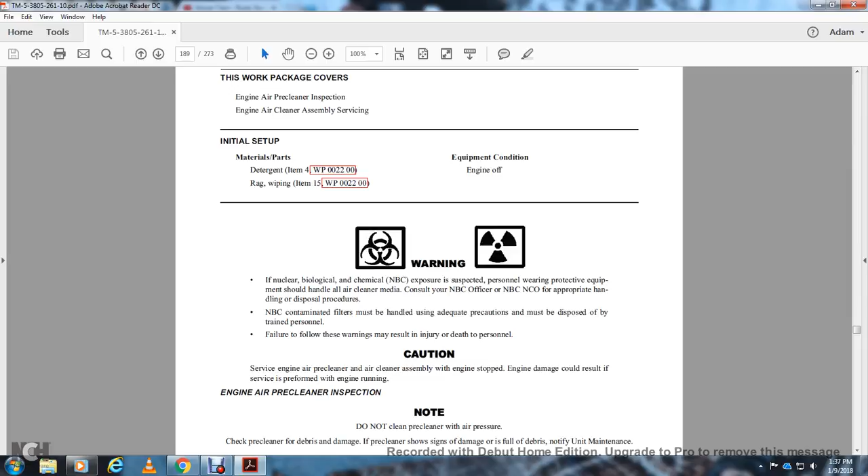Caution: servicing the engine air cleaner assembly while the engine is running could result in engine damage. Service should be performed with the engine stopped, not with the engine running, during air cleaner inspection.

Note: do not clean the pre-cleaner with air pressure. Check the pre-cleaner for debris or damage. If the pre-cleaner shows signs of damage or is full of debris, notify unit maintenance.

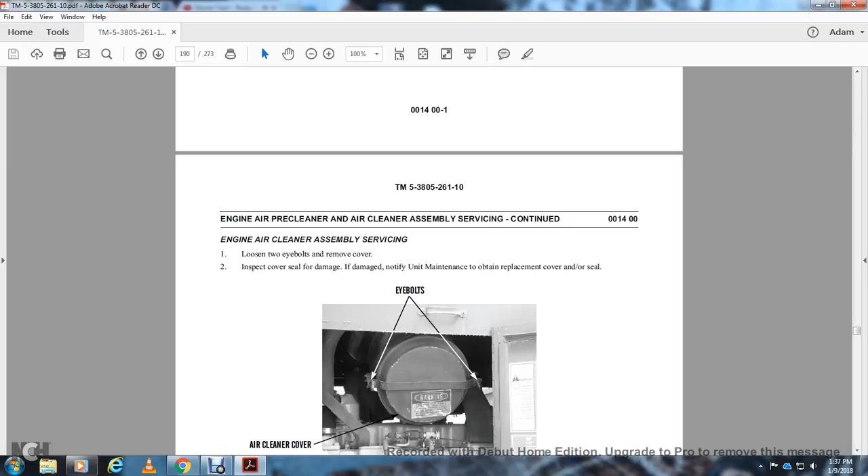Engine air cleaner assembly servicing: loosen the two eye bolts and remove the cover. Inspect the cover seal; if damaged, notify unit maintenance to obtain a replacement cover and seal. The eye bolts and air cleaner cover are shown in the picture.

Remove the primary element from the air cleaner housing. Notify unit maintenance to replace the secondary element if needed. Inspect the secondary element and notify unit maintenance if damaged, or if the primary element has been replaced for the third time. Wipe the inside of the air cleaner housing clean with a rag.

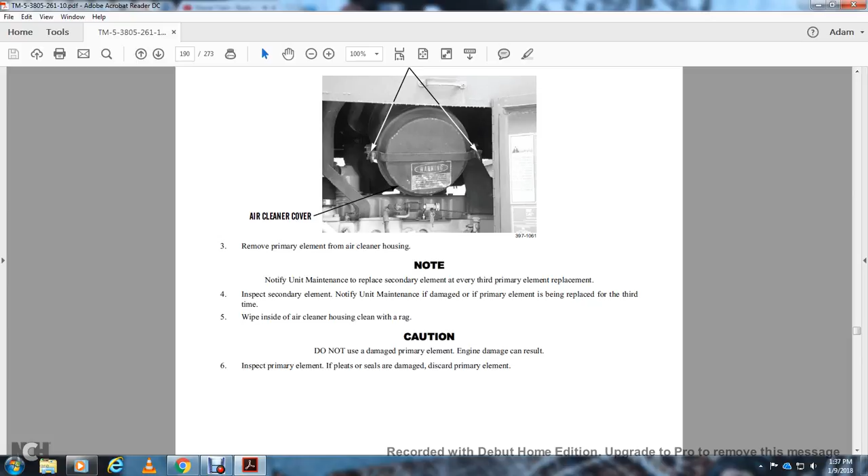Caution: do not use a damaged primary element. Engine damage can result from using a damaged primary element. If the pleats or seals are damaged, discard the primary element.

Engine air cleaner assembly, continued. Note: the primary element may be cleaned a maximum of 6 times. Also, replace the primary element after it has been in service for 1 year. The primary element, secondary element, and air cleaner housing are shown.

To clean the primary element, use compressed air not exceeding 30 psi, or pressurized water not exceeding 40 psi, for cleaning purposes. Wear protective gear including gloves, goggles, and shields, and use caution to avoid injury to personnel.

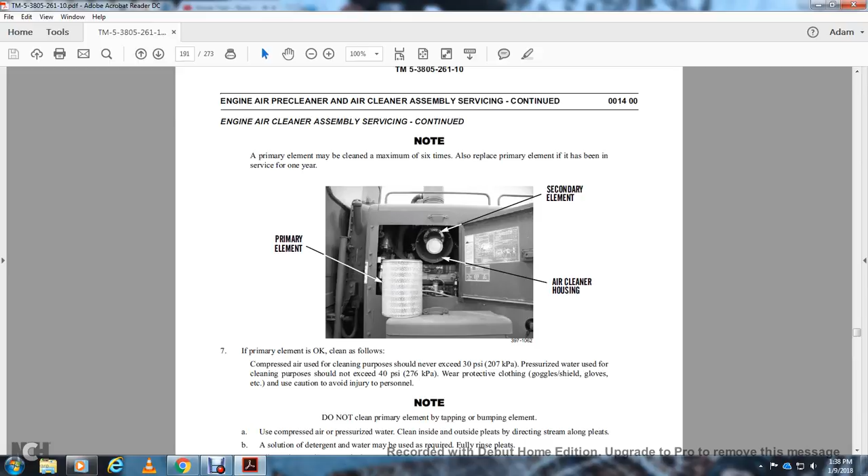Note: do not clean the primary element by tapping or bumping the element. Using compressed air or pressurized water, clean inside and outside of the pleats with a direct stream along the pleats.

A detergent and water solution may be used as required for a full rinse of the pleats. Allow the primary element to air dry completely. Inspect the primary element; if the pleats or seals are damaged, discard the primary element and obtain a replacement.

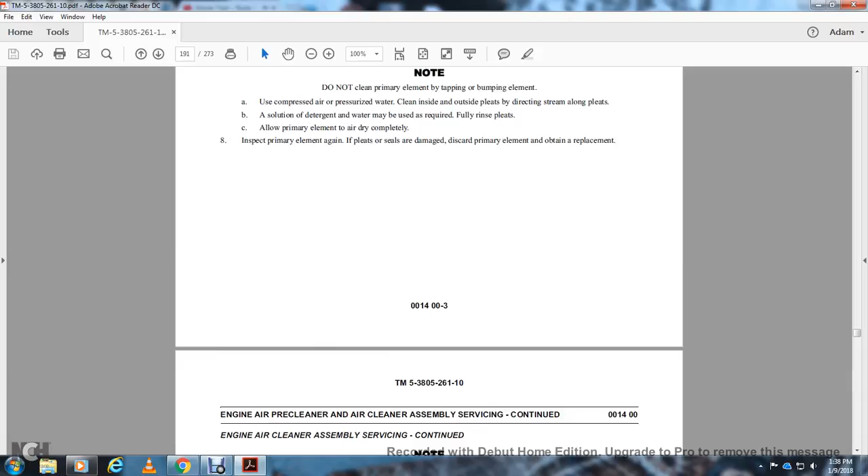Engine air cleaner assembly, continued. Note: the primary element must be clean and dry before installation. Install the primary element inside the air cleaner housing. The primary element, secondary element, and air cleaner housing are shown.

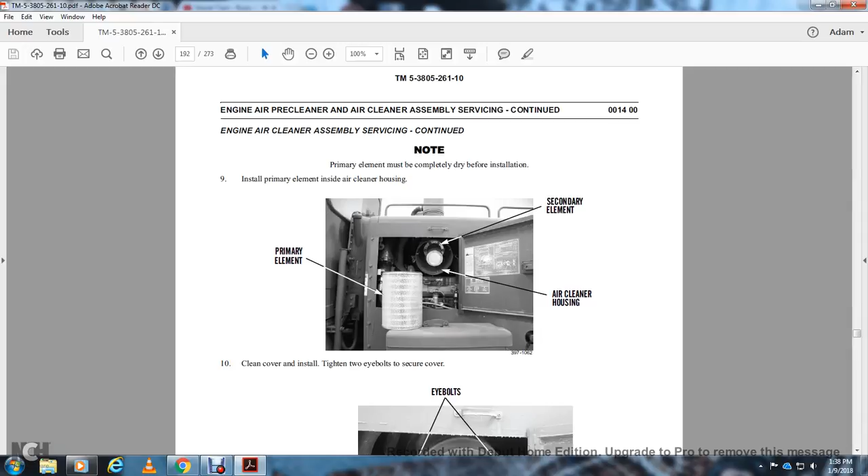Clean the cover and install it. Tighten the two eye bolts to secure the cover. The eye bolts and air cleaner cover are shown.

Air cleaner assembly, continued. Reset the air filter service indicator by pushing on the bottom of the indicator. Start the engine; if the air filter service indicator shows green or yellow, servicing is complete. If the indicator shows red, or if engine exhaust smoke is black, notify unit maintenance. End of work package.

Alright, fuse replacement. The work package covers removal and installation, initial setup of the fuse, and equipment conditions: machine parked on level ground, parking and emergency brake applied, implements lowered to the ground, and battery disconnect switch in the off position.

Warning: ensure the battery disconnect switch is in the off position before working on the fuse panel. Failure to follow this warning may result in injury.

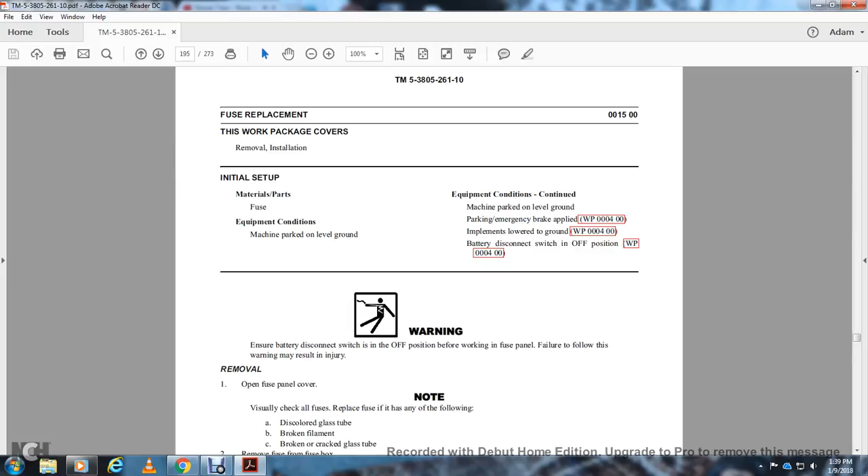Open the fuse panel cover and visually check all fuses. Replace the fuse if any of the following are found: discolored glass tube, broken filament, or broken glass tube. Remove the fuse from the fuse box and consult the unit manual for the replacement fuse.

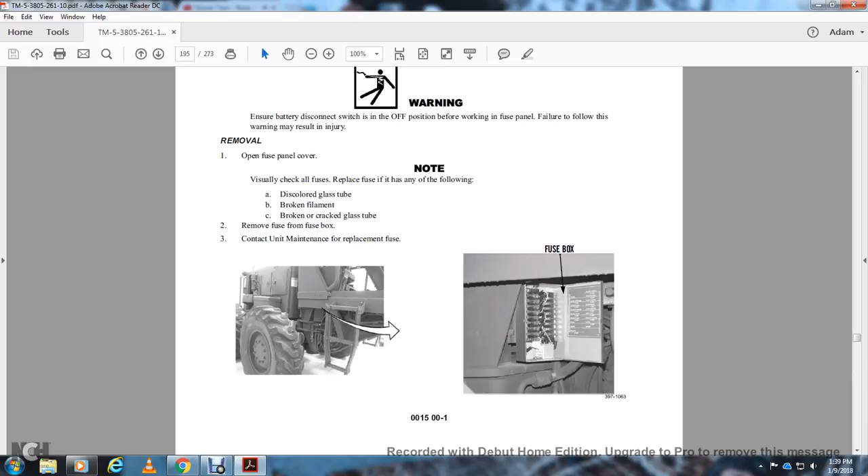The fuse box is shown. Caution: always verify the amperage rating of the new fuse. If not correctly used, a fuse with the wrong amperage could result in damage to the electrical system.

Install the new fuse in the fuse box and close the fuse box panel. Turn the battery disconnect switch on and operate the electrical system related for the new fuse to verify correct operation.

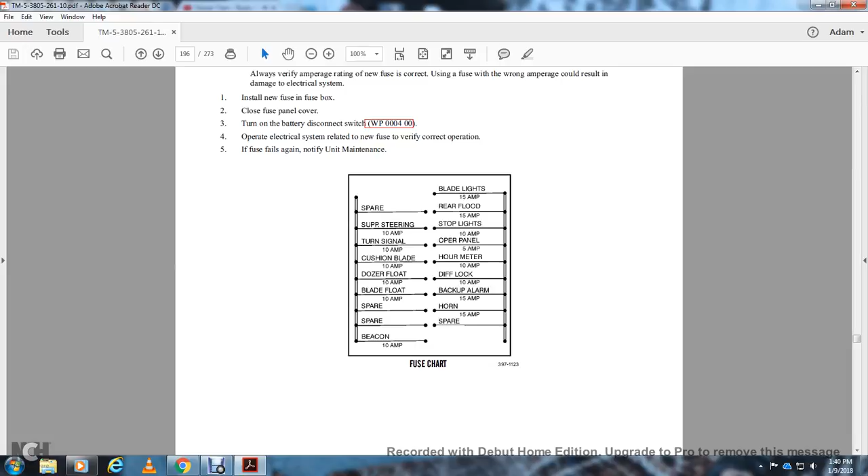If the fuse fails again, notify unit maintenance. Your fuse chart shows the spare, supplemental steering, turn signal, cushion blade, dozer float, blade float, spare beacon, spare horn, backup alarm, diff lock, hours meter, operator's panel, stop lights, rear flood, and blade lights.

Alright, tire maintenance. The work package for the tire pressure adjustment.

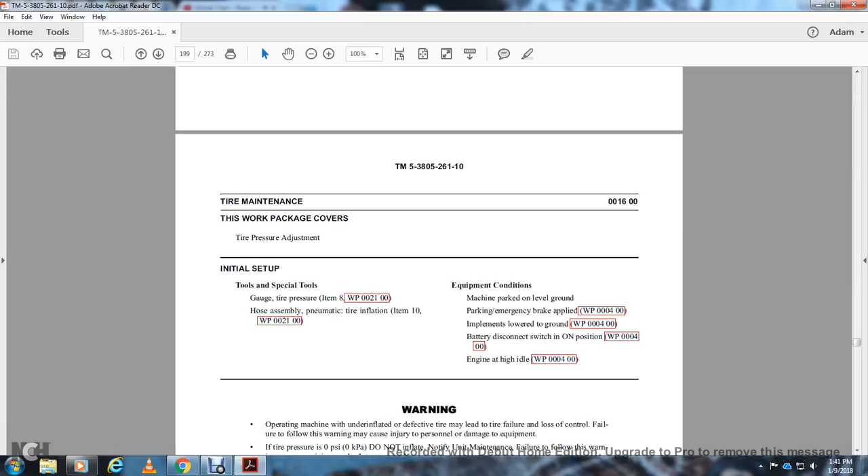Initial setup of tools and special tools: tire pressure gauge, hose assembly, pneumatic hose assembly, tire inflation. Machine parked on level ground, parking and emergency brake set, implements lowered to the ground, and battery disconnect switch on. Position engine at high idle.

Warning: operating the machine with an underinflated or defective tire may cause tire failure and loss of control. Failure to follow this warning may cause injury or damage to equipment. If tire pressure is 0 psi, do not inflate. Notify unit maintenance. Failure to follow this warning may cause injury or death to personnel.

Use a self-inflating chuck and stand to the side of the tread at the maximum distance allowed by the inflation hose. Failure to follow this warning may cause injury or death to personnel.

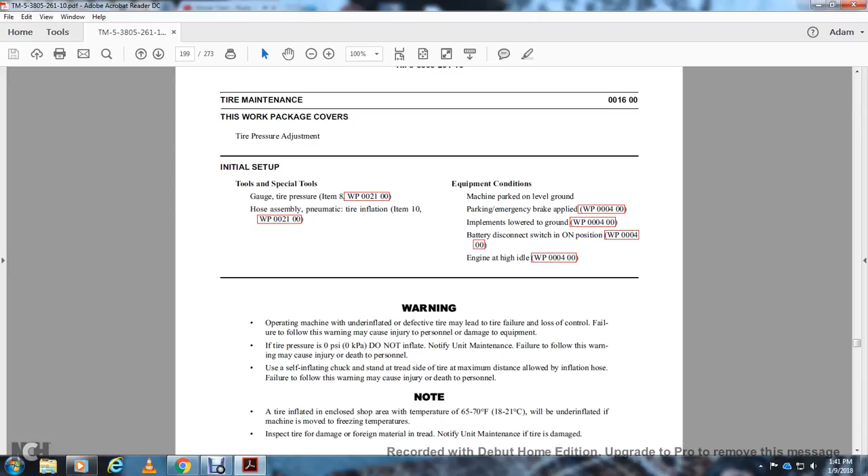Do not inflate the tire in an enclosed shop unless the air temperature is within 65 to 70 degrees Fahrenheit, or the tire will be underinflated when the machine is moved into freezing temperatures. Inspect the tire for damage, foreign material, and tread wear, and notify unit maintenance if the tire is damaged.

Tire pressure adjustment: remove the valve stem cap and check the tire pressure with the tire pressure gauge. Correct pressure is 35 psi for all tires on the 130G.

Attach the air chuck to the valve stem. Stand at the tread side of the tire at the maximum distance allowed by the inflation hose. Open the valve slowly to increase the air pressure in the tire.

Check the tire pressure periodically to ensure it is not overinflated. If necessary to reduce air pressure, disconnect the air chuck and press the valve stem core to vent air from the tire.

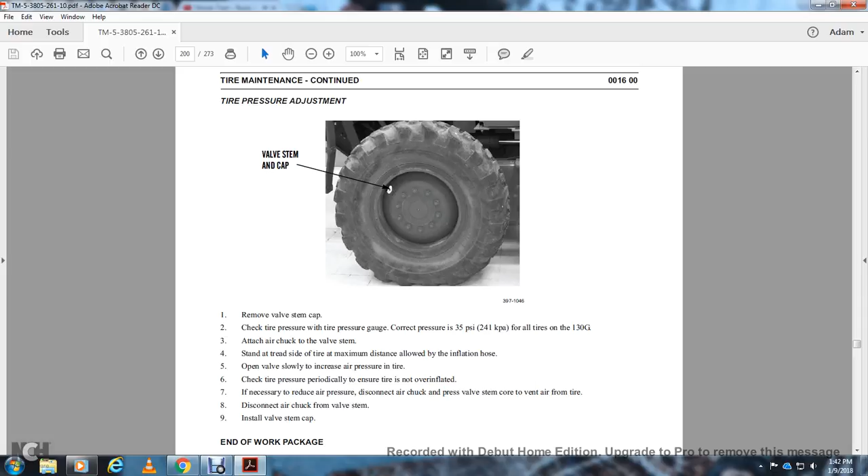Disconnect the air chuck from the valve stem and install the valve stem cap. End of work package.

General: check the regulations covering transportation of cylinders containing compressed gas. Check for overpass clearance when traveling. Make sure there is adequate clearance for the rollover protective structure in observance of applicable width, weight, and hauling permits. For detailed information on machine transportation, refer to TM 55-3805-261-14.

For rigging the machine for transportation, refer to FM 10-450-3 and FM 10-450-4. For sectionalization and air transportation, refer to work packages 018 and 019.

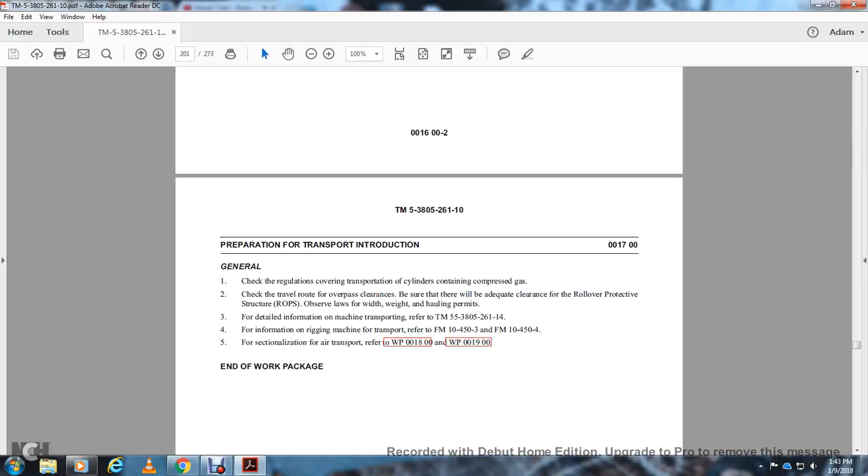This work package covers general information and the sectionalization procedure. Due to size and weight restrictions, the grader must be separated to be accomplished by air transportation helicopter, with each half of the rigid frame lifted separately by the helicopter.

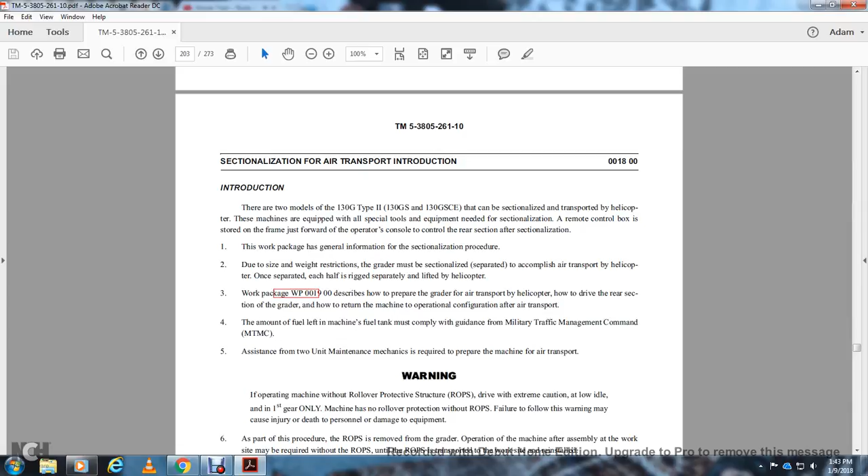Work package 19 describes how to prepare the grader for air transportation, how to drive the rear section of the grader, and how to return the machine to operational configuration after transportation. The amount of fuel left in the machine's fuel tank must comply with the guidance of the Military Traffic Management Command, or MTMC. Assistance from two unit maintenance mechanics is required to prepare the machine for air transportation.

Warning: if operating the machine with a rollover protective structure removed, drive with extreme caution at low idle in first gear only, as the machine has no rollover protection system (ROPS). Failure to follow this warning may cause injury or death to personnel, or damage to equipment.

Warning: use extreme caution when handling heavy parts. Provide adequate support and assistance during this procedure, ensuring a lifting device is used that is in good condition with suitable lifting capacity to safely support the heavy part. Failure to follow these warnings may result in injury or death to personnel.

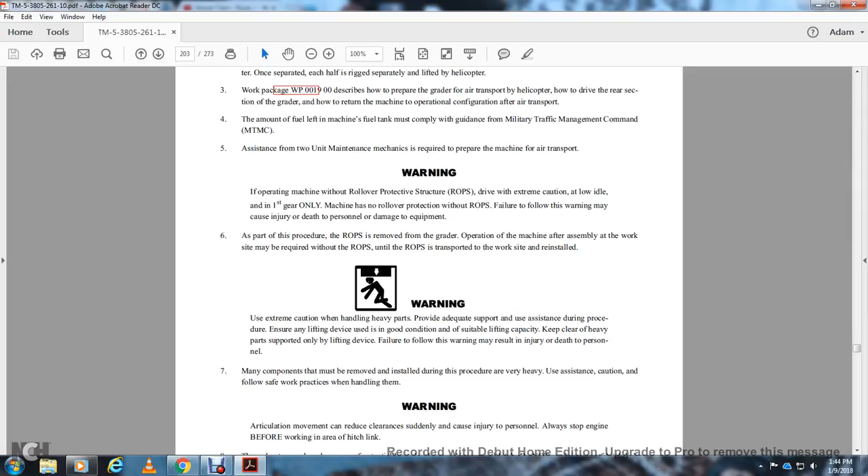Many components that may be removed and installed during this procedure are very heavy. Use assistance and follow the safety practices when handling them.

Articulation movement can reduce clearance suddenly and cause injury. Stop the engine before working in the area of the hitch link. Thoroughly review the procedure and be aware of potential hazards when working around the hitch. Do not work in an area near the hitch link unless the engine is shut down.

Tools and equipment required in this section are stored in the toolbox located at the front of the machine. Basic issue item tools must also be used, with the following list of sizes needed to complete the procedure.

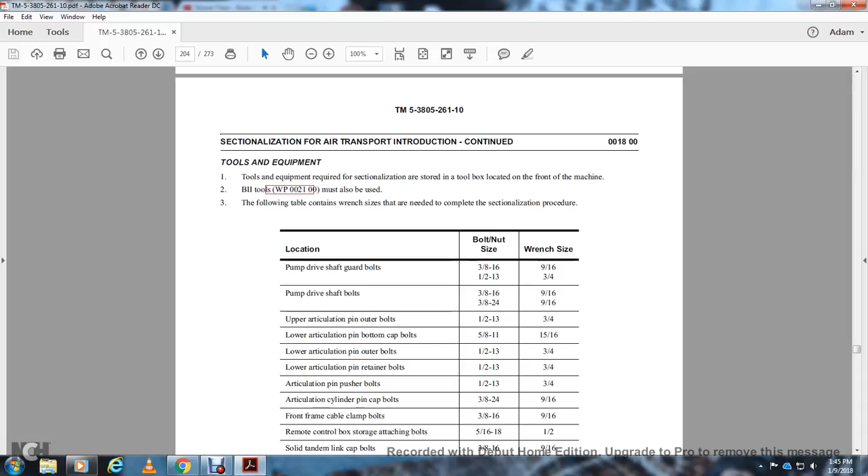End of work package.

Work package 19: sectionalization for air transport. This work package covers disassembling the drive at the rear of the frame, with assembly tools and specialty components needed, along with basic items such as rags for wiping, tags for marking, and cotter pins.

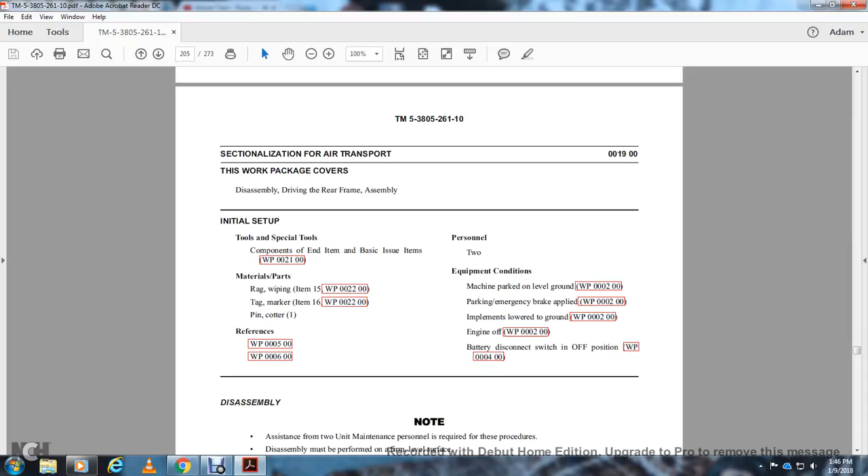Equipment needed: machine parked on level ground, parking brake applied, emergency brake engaged, implement lowered to the ground, engine off, and battery disconnect switch in the off position.

Note: assistance from unit maintenance personnel is required for these procedures. Disassembly must be performed on firm, level ground.

When returning hardware, replace the bolts in the same holes from which they were removed, and be sure they are tightened enough so they will not loosen from vibration.

Notify unit maintenance to remove the rollover protection structure from the machine, and to move the two front machine supports to the rear support brackets for the rear machine. Install the six rollover protective structure bolts and bushings on the bottom support.

Start the engine and center the blade and side shift cylinders. Position the blade at a 90 degree angle and lower the blade to the ground. Apply slight downward pressure to reduce the front weight on the articulation joint, then shut down the engine.

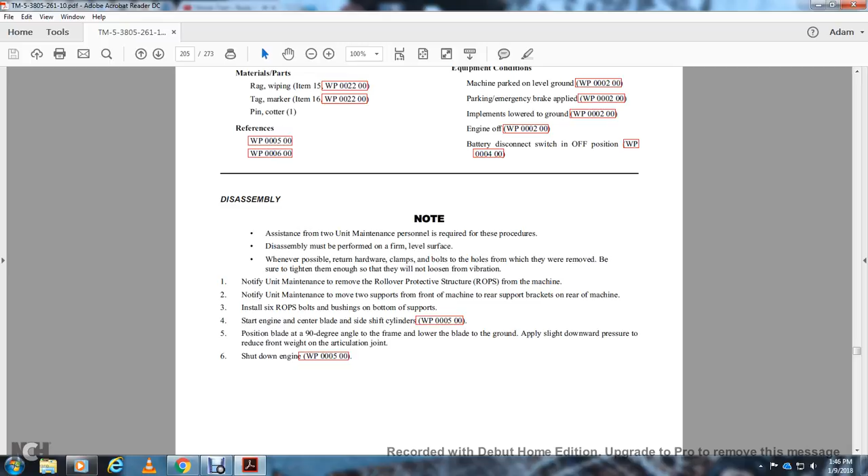Remove the 3 bolts and washer from the top hydraulic drive shaft guard. Remove the 4 bolts and washers from the hydraulic pump drive shaft guard. Remove the 8 bolts from the hydraulic pump shaft U-joints, 4 bolts on each end. Remove the hydraulic pump drive shaft and U-joint assembly.

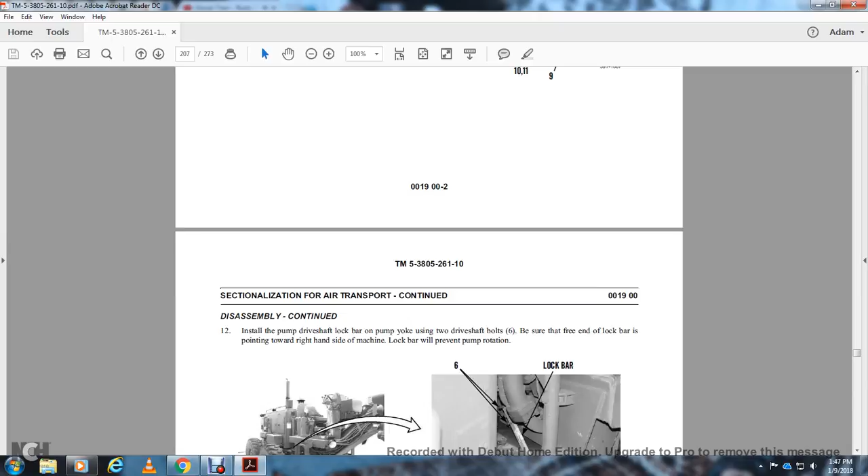Remove the 4 outer bolts, nuts, and washers from the top upper pivot pin. Install the pump drive shaft lock bar on the pump yoke with the drive shaft, ensuring the free end of the locking bar points toward the right side of the machine. The lock bar will prevent rotation.

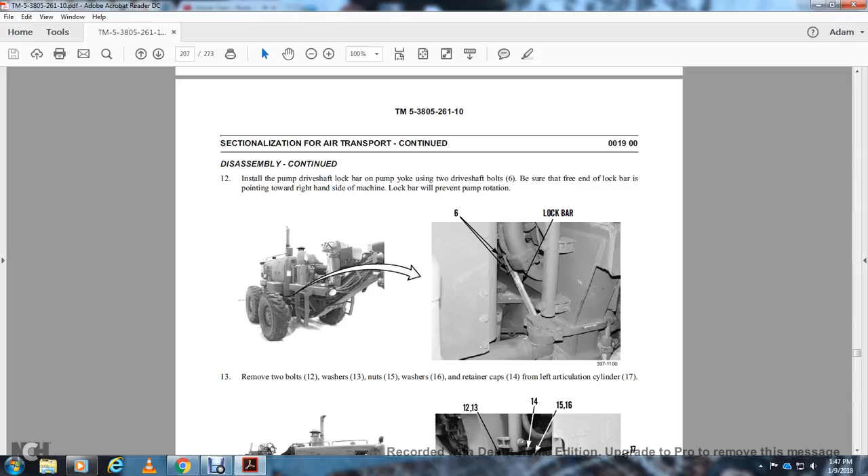Remove the 2 bolts, washers, nuts, and washers, then remove the retainer caps from the left articulation cylinder. Remove the 4 bolts, washers, and the 2 retainer caps for the right articulation cylinder.

Remove the 3 bolts, washer, and cap for the bottom lower pivot cylinder pin. Disassembly continues: loosen the 6 retainer bolts on the bottom of the lower pivot pin by about 1/2 inch.

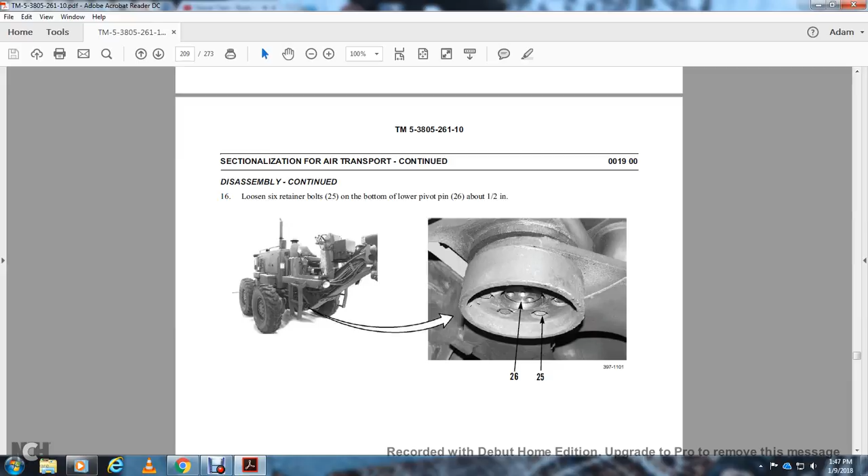Caution: keep the hydraulic and air hose connectors clean. Do not allow dirt or contamination to enter the fittings. Note: tag the hoses before disconnecting to aid installation.

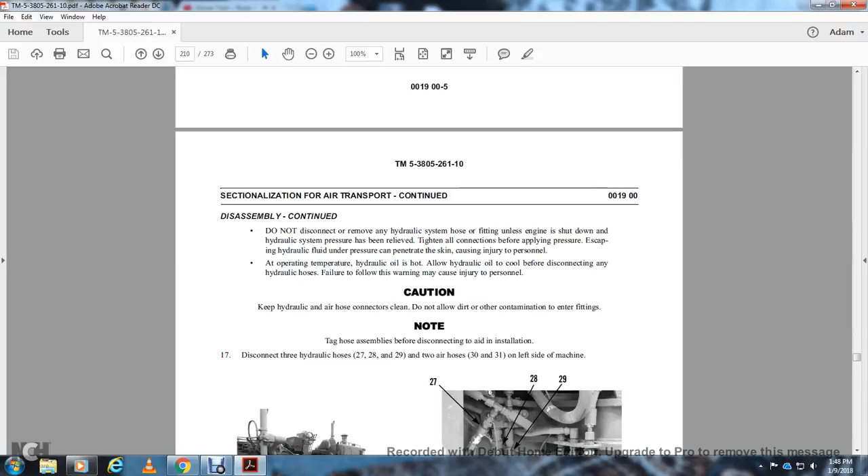Disconnect the 3 hydraulic hoses 27, 28, and 29, and the 2 air hoses 30 and 31 from the left side of the machine. Remove the dirt, install the dust covers, and install the connectors.

Disconnect the hydraulic hose 32 with the air hoses 33, 34, and 35 on the right side of the machine. Remove the dirt from the dust covers and install the connectors. Note: repeat this step on the right side as was done on the left side.

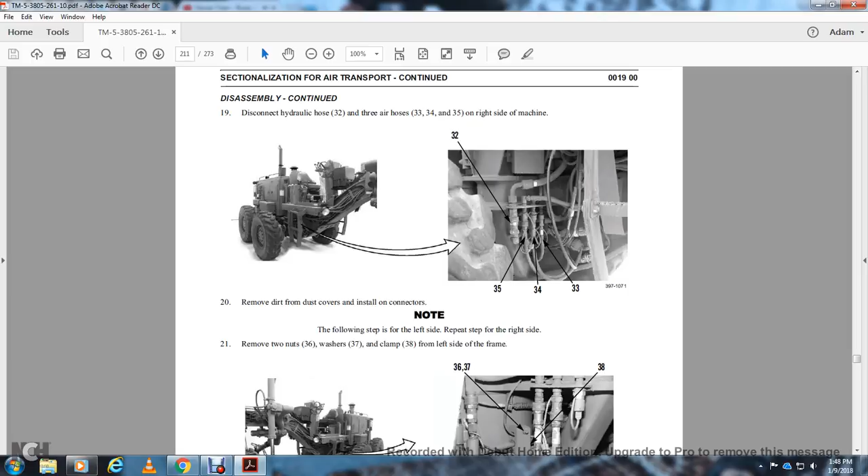Disconnect the throttle cable on the right side of the machine. Install the dust covers. Disconnect the forward-reverse cable on the right side of the machine, then tag both ends of the forward and reverse cable.

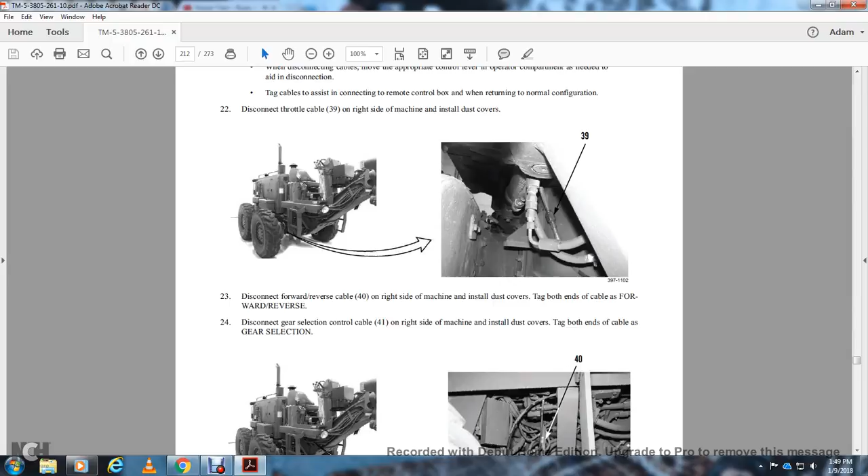Disconnect the gear selection control cable 41 on the right side of the machine. Tag both ends of the gear selection cable. Tag the cables to assist in connecting the remote control box when returning to normal configuration.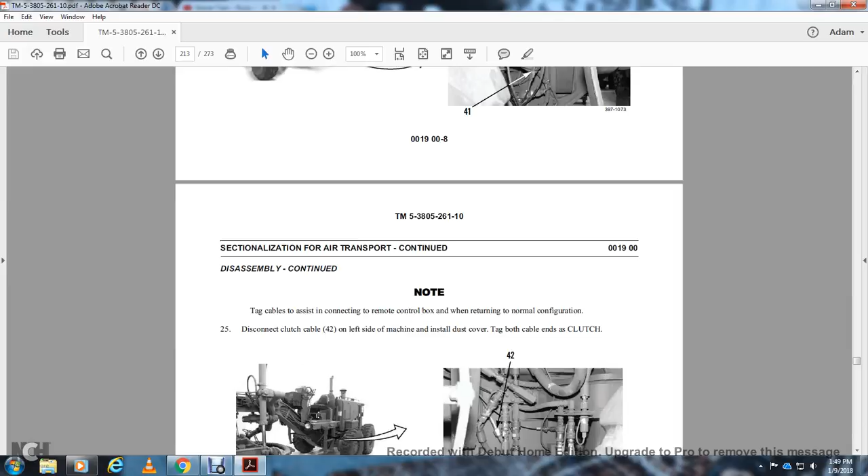Disconnect the control clutch cable 42 on the left side of the machine, install the dust cover, and tag both ends of the clutch cable.

26. Disconnect the 3 wiring harnesses 43, 44, and 45. Install the dust covers on all the connections. Remove the bolt 46 and washers 47.

Then remove the clamp 48 holding the control cable below the operator compartment. 28. Remove the control cable from the clamp 48 and install the clamp 48 with the washer 47 and bolt 46 in the original location.

Disassembly continued. Pull the hose and the cable of the wiring harness from the platform support on both sides of the machine. Warning: wear eye protection when disconnecting the hydraulic hose. Failure to follow this warning may cause injury to personnel.

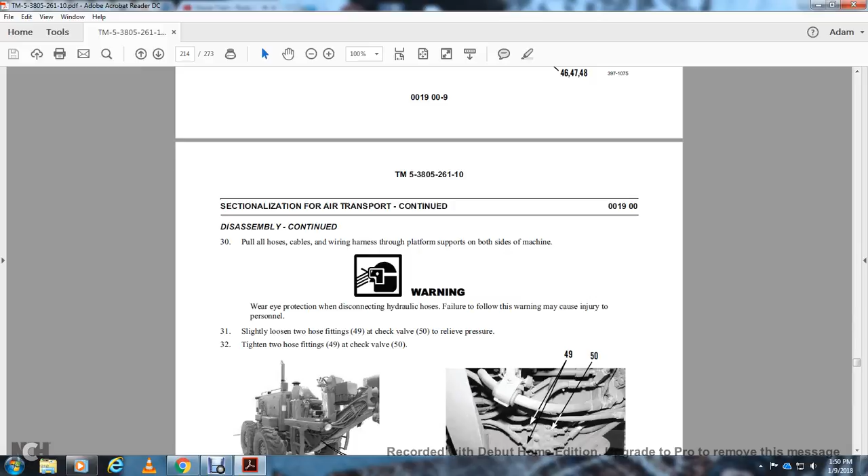Loosen the 2 hose fittings 49 at check valve 50. Relieve pressure, then tighten the 2 hose fittings 49 at check valve 50. Note: repeat this step on the right side of the machine as done on the left.

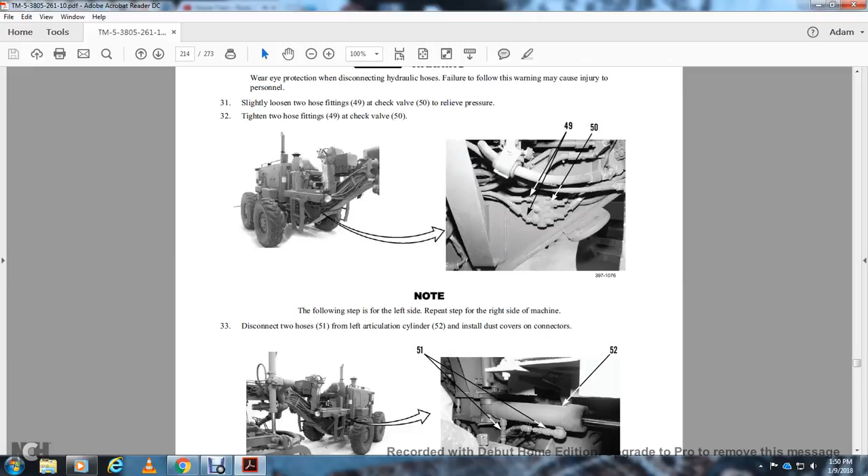Disconnect the 2 hoses 51 from the left articulation cylinder 52 and install dust covers on the connectors. Remove the 2 cotter pins 55 and pins 53 from both ends of the articulation indicator connector rod 54. Discard the cotter pins.

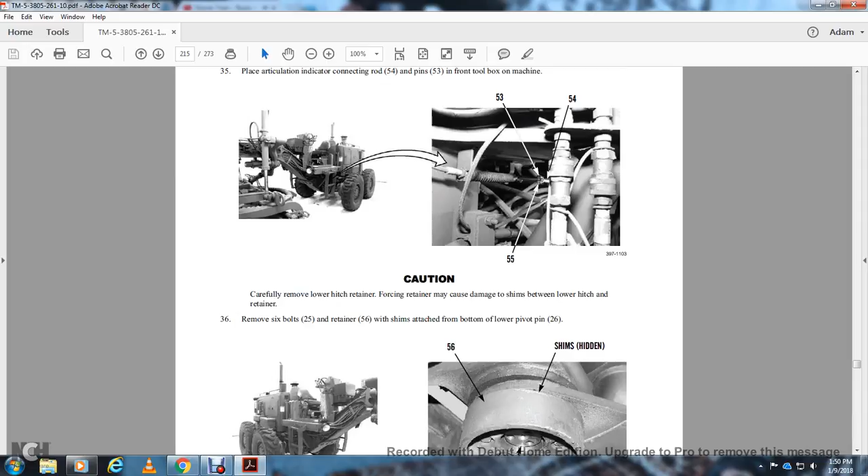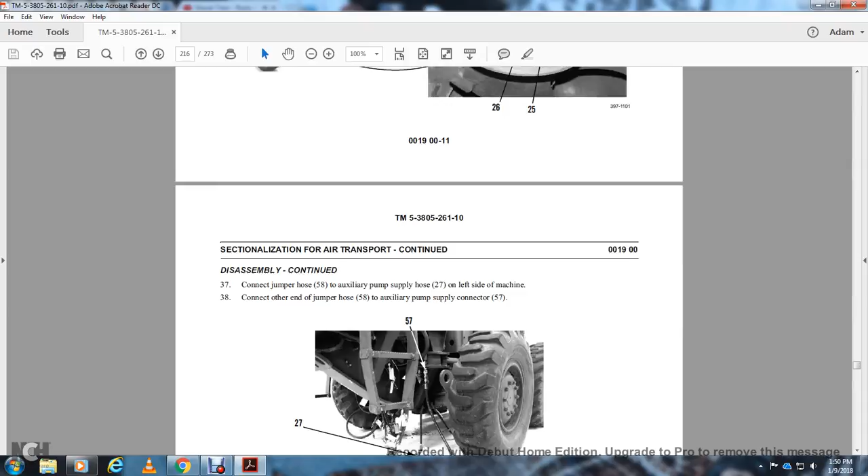Connect the jumper hose 58 from the auxiliary pump supply 27 on the left side of the machine. Connect the other end of jumper hose 58 to the auxiliary pump supply connector 57.

Connect the jumper hose 60 to the auxiliary pump return hose 32 on the right side of the machine. Connect the other end of jumper hose 60 to the tank hose connector 59.

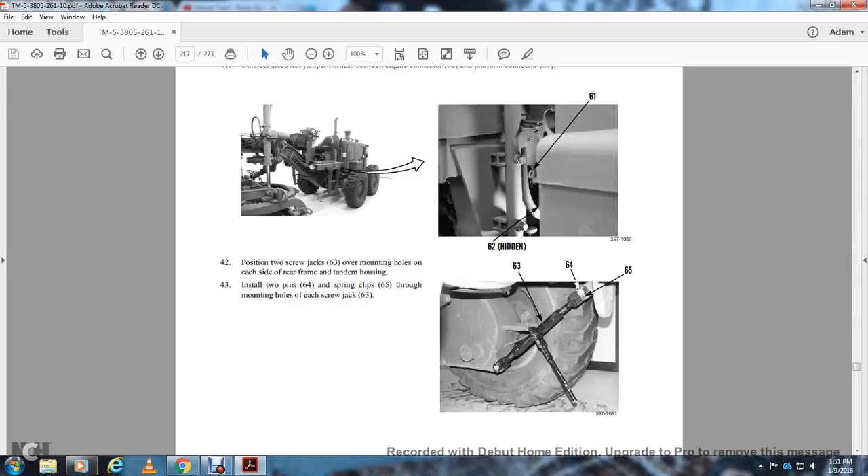Install 2 pins 64 and spring clips 65 through the mounting holes on each screw jack 63. Disassembly continued, for sectionalization and air transportation.

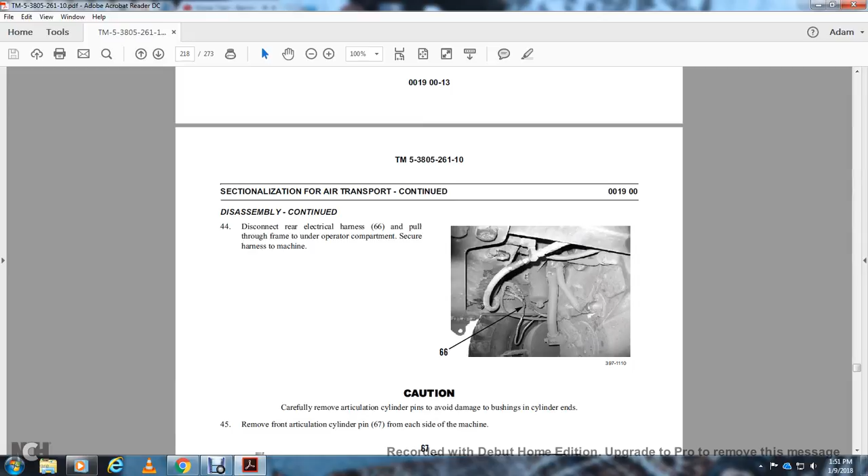44. Disconnect the rear electrical harness and pull it through the frame under the operator compartment. Secure the harness to the machine. Carefully remove the articulation cylinder pins to avoid damage to the bushings and cylinder ends.

45. Remove the front articulation cylinder pin 67 from each side of the machine.

Disassembly continued. Do not turn on the auxiliary pump for more than 30 seconds. Allow the pump to cool for 1 minute before each use. Note: to relieve the load of the hitch, turn the battery disconnect switch, then the auxiliary pump switch, then adjust the blade height.

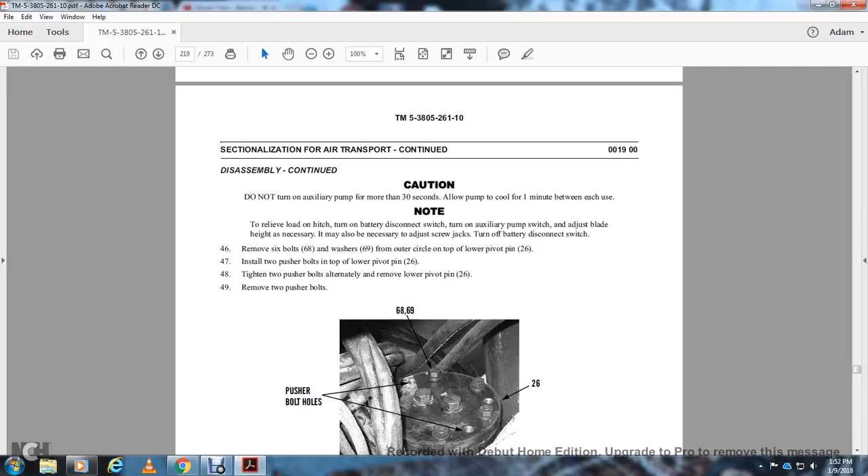It is also necessary to adjust the screw jack. Turn off the battery disconnection switch, remove the 6 bolts 68 and washers 69 from the outer circle on the top of the lower pivot pin 26. Install the 2 pusher bolts in the top of lower pivot 26 and tighten them alternately. Remove the lower pivot pin 26, then remove the 2 pusher bolts.

Install the 2 pusher bolts on top of the upper pivot pin 9. Tighten the pusher bolts alternately. Remove the upper pivot pin 9, then remove the 2 pusher bolts.

Disassembly continued. Warning: use extreme caution with the handling of heavy parts. Provide adequate support for the system. Failure to follow this warning may result in injury to personnel. Note: the remote control box weighs 68 pounds.

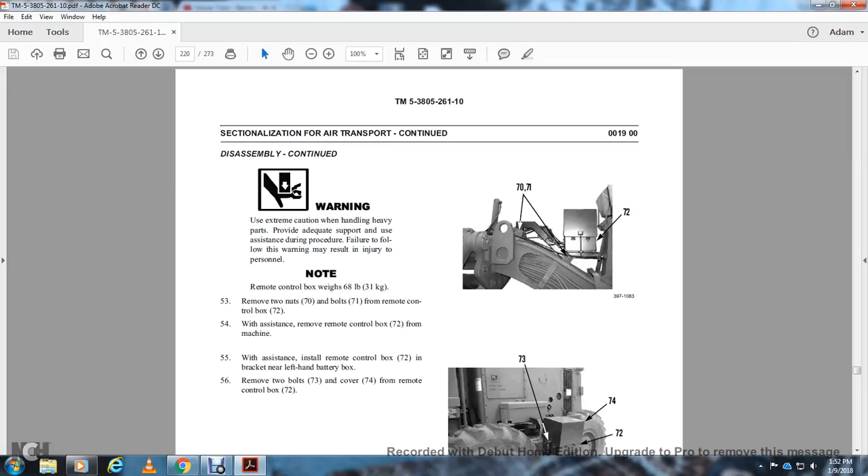Remove the 2 nuts 70 and bolts 71 from the remote control box. With an assistant, remove the remote control box from the machine. With the assistant, install the remote control box in the bracket near the left-hand battery box. Remove the 2 bolts and cover 74 from the remote control box 72.

Remove the dust cover from the cable and hose. Connect the remote control hose and wiring harnesses 75 to the machine.

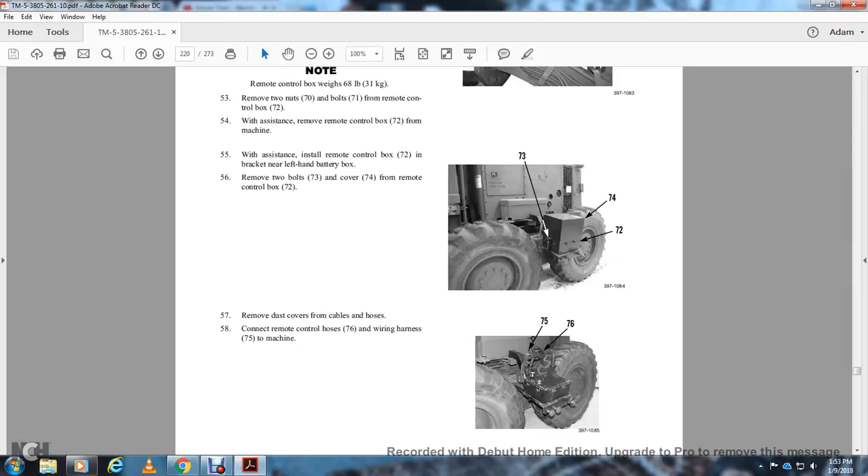Note: to aid the clutch cable connection, press the button with the remote control box clutch control to allow the cable to move freely. Connect the remote control cable to the machine cable, using the tag added during removal, to turn on the battery disconnect switch and start the engine.

Driving the rear of the frame with the work package. Warning: keep all personnel away from the machine when separating the front and rear sections. The front section may drop a few inches if there is not enough blade down pressure.

Apply a slight amount of blade down pressure. Drive the rear frame slowly about 3 feet away from the front section. Guide the jumper hose carefully to prevent damage.

Driving the rear frame with the work package. Disconnect the electrical jumper cable and the 2 jumper hoses connecting the front end to the rear section. Install the dust caps on the hose ends. Install the upper pivot pin 9, bolt 10, and washer 11 on the front frame.

Tighten bolts enough to secure the pin. Install the lower pivot pin 26, bolt 68, and washer 69 with the rear frame. Tighten the bolts enough to secure the pin. Install the retainer 56 and bolts 25 on the lower pivot pin 26.

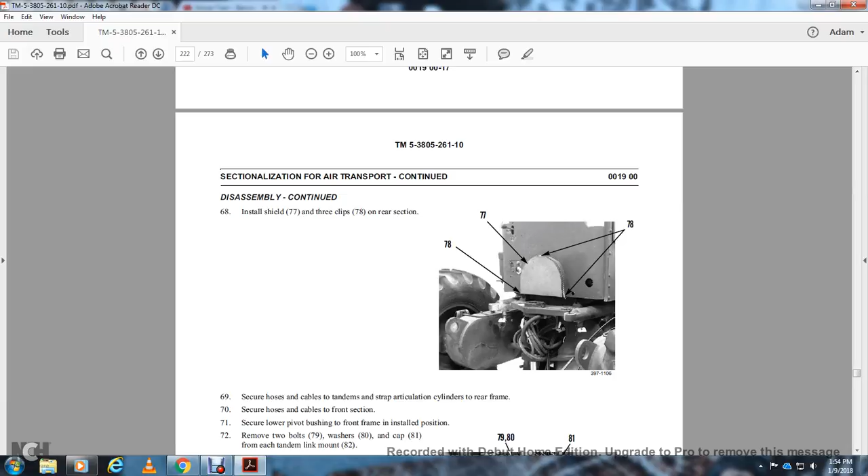Install the shield 77 and the 3 clips 78 on the rear section. Secure the hose and cable to the tandem, strap the articulation cylinders to the rear frame, and to the front section. Secure the lower pivot bushing with the front frame in the installed position.

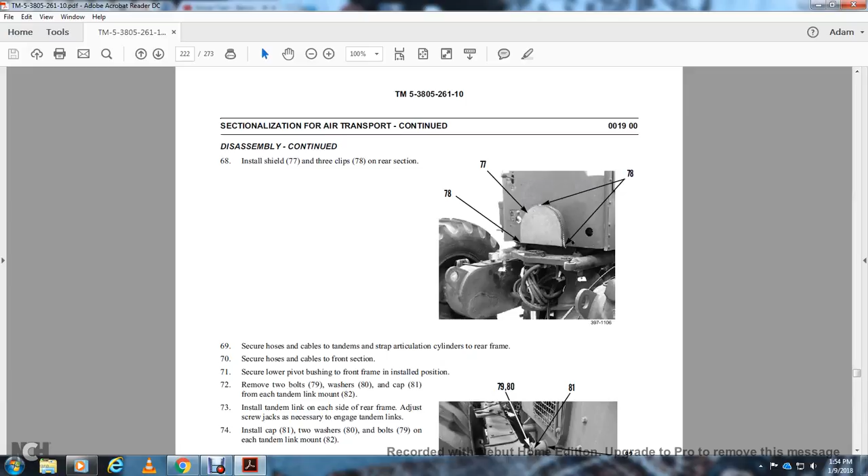Remove the 2 bolts 79 and washers 80 and the cap 81 from each tandem link mount 82. Then install the tandem link on each side of the rear frame. Adjust the screw jacks as necessary to engage the tandem links. Install the cap 81, 2 washers 80, and bolts 79 on each tandem link mount 82.

Remove the screw jacks and store them in the toolbox.

Disassembly continued. Note: at this point, the rear frame can be driven to an airlift sling location before the sling is used for the remaining disassembly steps.

Disconnect the remote control hose 76 and wire harnesses 75 from the machine. Install the dust plugs on all connections. Disconnect the 3 remote control cables 40, 41, and 42 from the machine cables. Install the dust covers.

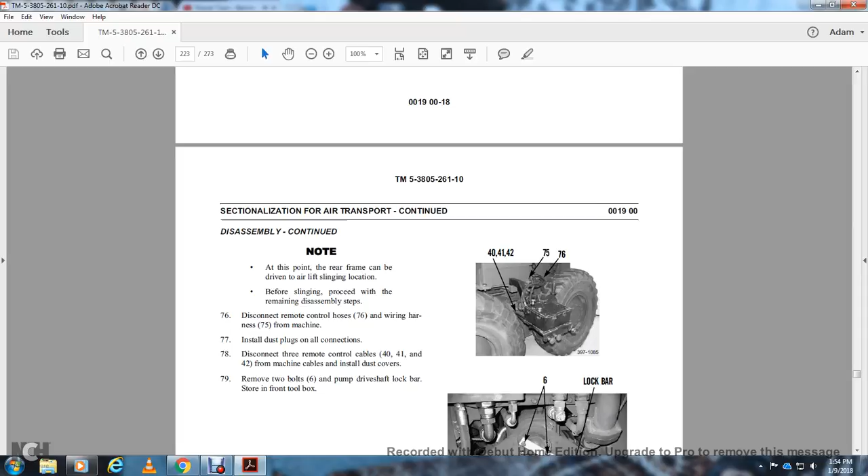Remove the 2 bolts, the pump drive shaft lock bar, and store it in the front toolbox. Install the cover 74 with the 2 bolts 73 on the remote control box 72.

Warning: use extreme caution in handling heavy parts. Provide adequate support and use an assistant during the procedure. Failure to follow this warning may result in injury to personnel. The control box weighs 68 pounds.

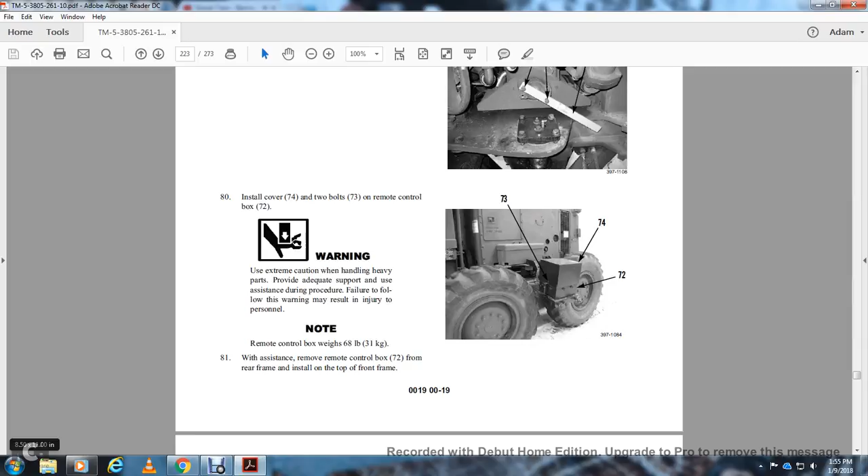With the assistant, remove the remote control box 72 from the rear frame. Install on the top of the front frame. Disassembly.

Install 2 nuts, 70, bolts, 71, with the remote control box, 72. Install the 2 straps, item 20, on the remote control box for the hose and cable to store the articulation cylinder pin for the pump, drive shaft, guard, screw jack, tools, jumpers, and all other loose parts of the toolbox.

Secure the toolbox lid in the front frame. For the toolbox inventory list, ensure all the parts are accounted for. Cover the pivot pin bores with plastic or other material to prevent foreign material accumulation on the machine surface. Secure the covering with tape.

Driving the rear of the frame. Warning: wear hearing protection when operating the rear section. Failure to follow this warning may result in hearing damage.

The remote control operation can be accomplished by one person using a ground guide to aid in supporting and aligning the frame assembly.

The backup alarm should sound with the transmission direction control in reverse. Turn the battery disconnect switch on. Move the throttle to the low idle position.

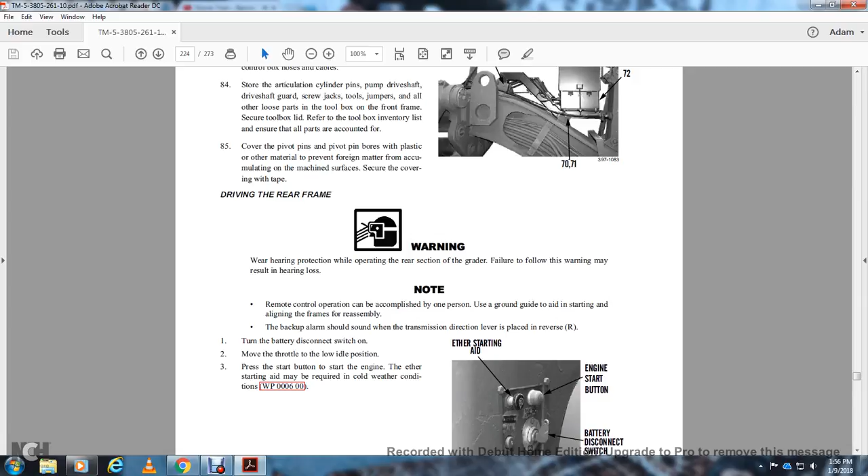Press the engine start button to start the engine, using an ether starting aid if required by cold weather conditions, via the engine start button and battery disconnect switch.

Driving the rear frame, continued. Warning: stop immediately if the low air indicator light illuminates. Determine the source of the problem before continuing operation. The low air light will come on momentarily after starting the engine.

Never shift the transmission higher than first gear. Use extreme caution when operating with the remote control. Be ready at all times to release the steering control button and pull the emergency brake if a dangerous situation occurs. Failure to follow these warnings may result in injury to personnel or damage to the machine.

Identify the parking brake, differential lock, service brake control, steering control, clutch rod control, forward/reverse control, gear selection control, and low air pressure indicator.

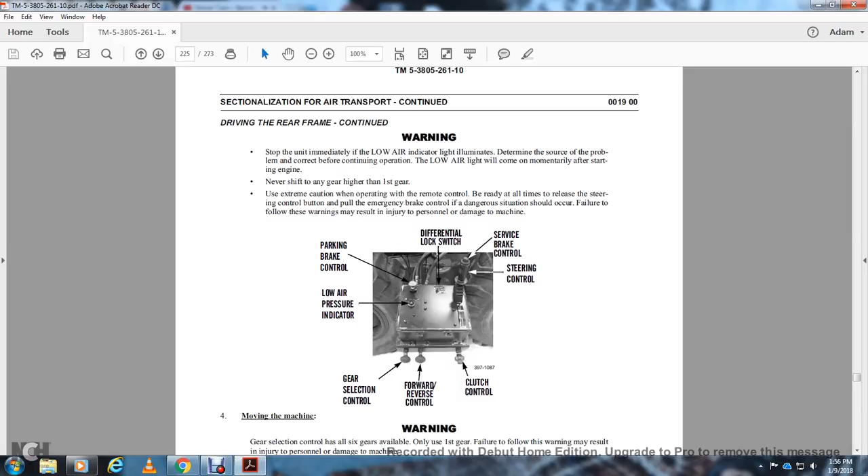Moving the machine. Warning: the gear selection control has all 6 gears available, though only first gear should be used. Failure to follow this warning may result in injury to personnel or damage to the machine.

Shift the transmission to first gear, set the transmission direction control to the desired direction, and move the differential lock switch off. Release the parking/emergency brake by pushing the control in on the control box, and remove the service brake pressure by pressing the button on the steering control, then release the button.

It is not necessary to press the button on the clutch control to engage the clutch; that button is only used when connecting the clutch cable while the engine is off.

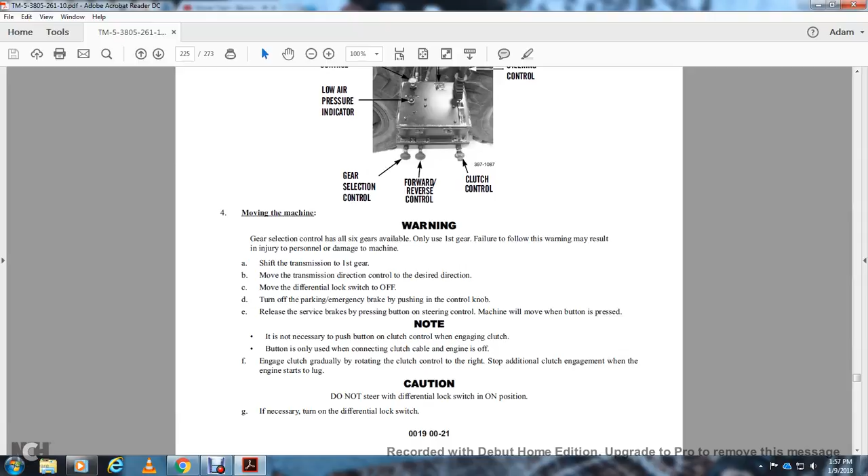Engage the clutch gradually by rotating the clutch control to the right. Stop rotating once clutch engagement causes the engine to start to lug. Caution: do not steer with the differential lock switch in the on position; if necessary, turn on the differential lock switch.

Driving the rear frame, continued. Note that the direction of the left and right steering positions relates to the direction of travel.

When moving the machine forward, pulling the steering control toward you turns the machine left; pushing the steering control away from you turns the machine right.

When moving the machine in reverse, the steering control directions reverse: holding the steering control toward you turns the machine right, and pushing it away from you turns the machine left. Additional clutch engagement may be needed to slide the wheels when turning, depending on ground conditions.

To stop the machine, apply the service brake, release the button, carefully center the steering control, disengage the clutch by rotating the clutch control to the left, and pull out the parking/emergency brake control.

Shift the transmission to neutral by pulling the gear selection control fully out. Shut down the engine by moving the throttle to the no-fuel position. Turn off the battery disconnect switch.

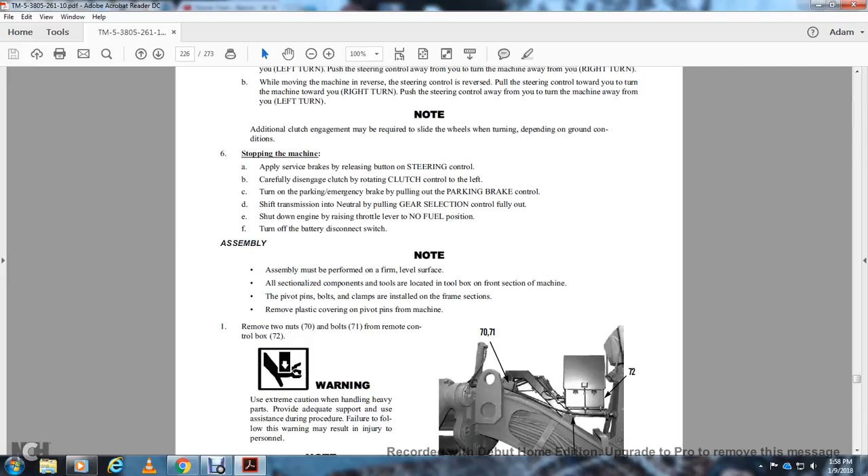Remove the plastic covering from the pivot area of the machine. Remove the 2 nuts, 70, the bolt, 71, and the remote control box, 72.

Warning: use extreme caution when handling heavy parts. Provide adequate support and use the assistance of another person. Failure to follow this warning may result in injury to personnel. Note: the remote control box weighs 68 pounds.

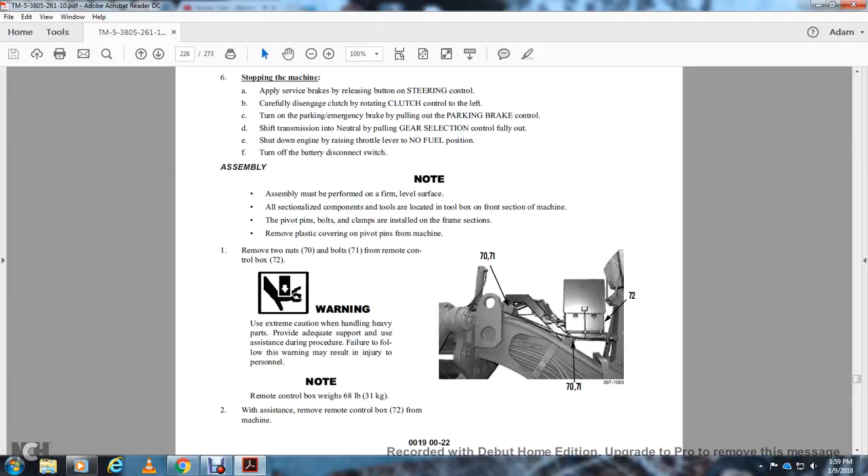With assistance, remove the remote control box from the machine. Install the remote control box, 72, near the left-hand battery box.

Remove the 2 bolts, 73 and 74, for the remote control box, 72. Remove the dust cover from the cable and hose, then connect hose 76 and wire harness 75 to the machine. Note: the control levers may be adjusted to make the cable connection if necessary.

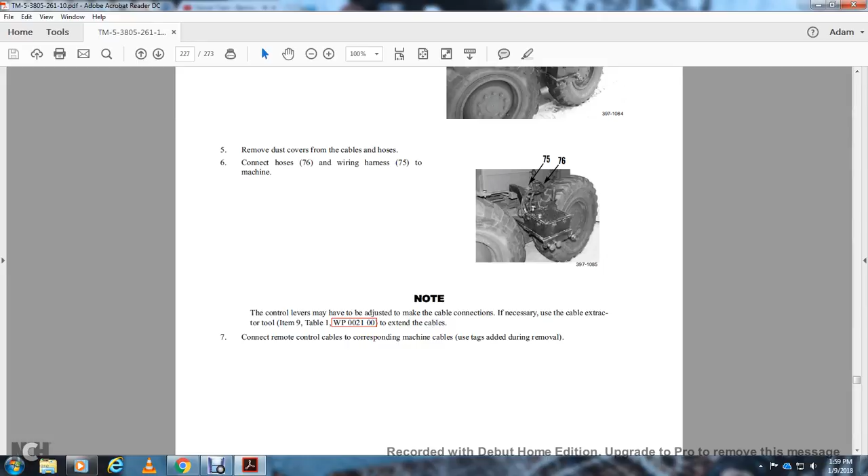Use the cable extractor tool, item 9, to connect the remote control cable to the corresponding machine connection. Use the tag during the removal.

Use the 2 screw jacks over the mounting holes to jack up the rear of the frame at the tandem housing. Install the 2 pins and spring clips at the 2 mounting holes on screw jack 63. Adjust screw jack 63 as needed to remove load from the tandem links.

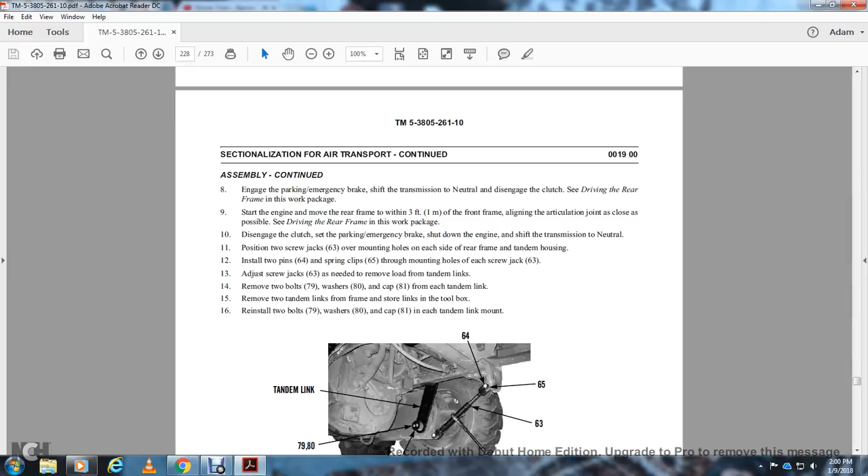Remove the 2 bolts 79, washers 80, and caps 81 for each of the tandem links. Remove the 2 tandem links from the frame and store them with the links in the toolbox. Reinstall the 2 bolts, washers 79 and 80, and caps 81 from the tandem link mount.

Remove the straps, item 28, table 1, securing the articulation cylinders and cables and hoses. Remove the straps, item 19, table 1. Secure the lower pivot positions.

Pull the articulation cylinder away from the frame. Install the lock bar with 2 bolts and pull the pump shaft yoke on the other section. Remove the 4 bolts 10 with washers 11 and the upper pivot pin 9 from the front section.

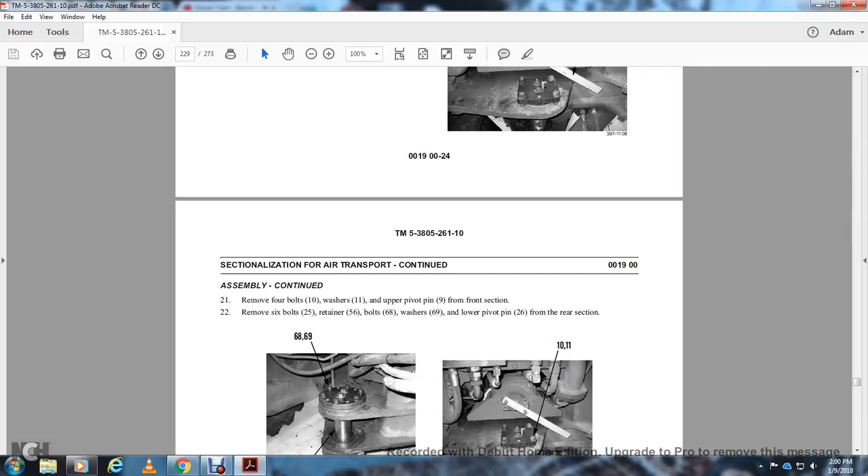Remove the 6 bolts 25, and the bolts 68 with washers 69, along with the lower pivot pin, from the rear section.

Connect the jumper hose 58 with the auxiliary supply hose 27 on the left side of the machine. Connect the other jumper hose with the auxiliary pump supply connector 57. Connect the jumper hose with the auxiliary pump return hose on the right side of the machine. Connect the other end of the jumper hose to hose connector 59.

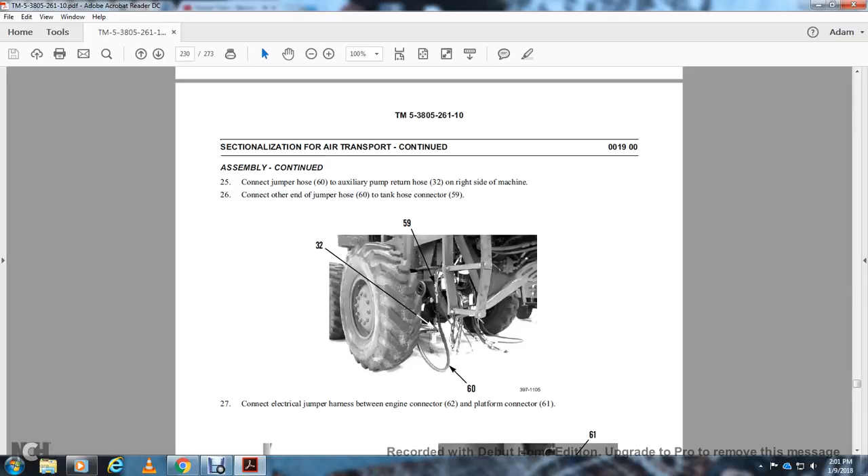Connect the electrical harness between the engine connector 62 and the platform connector 61.

Assembly continued. Keep all personnel away from the machine when the rear section is moving while adjusting the blade. Failure to heed this warning may cause injury or death to personnel. Precaution: do not run the auxiliary pump for more than 30 seconds; allow the pump to cool for 1 minute between each use.

Turn on the battery disconnect switch, start switch, and start the engine. Drive the rear swing section very slowly toward the front of the frame. Do not steer; keep the proper position relative to the frame using the control lever.

Hold the appropriate blade lever in the desired position, using the auxiliary pump to align with the pivot pin. Shift the transmission to neutral and shut down the engine.

If required, adjust the screw jack length to align the blade control lever with the auxiliary pump switch to align the bottom pin. Apply grease to the pivot pin and pivot pin bore, then carefully install the lower pivot pin 26.

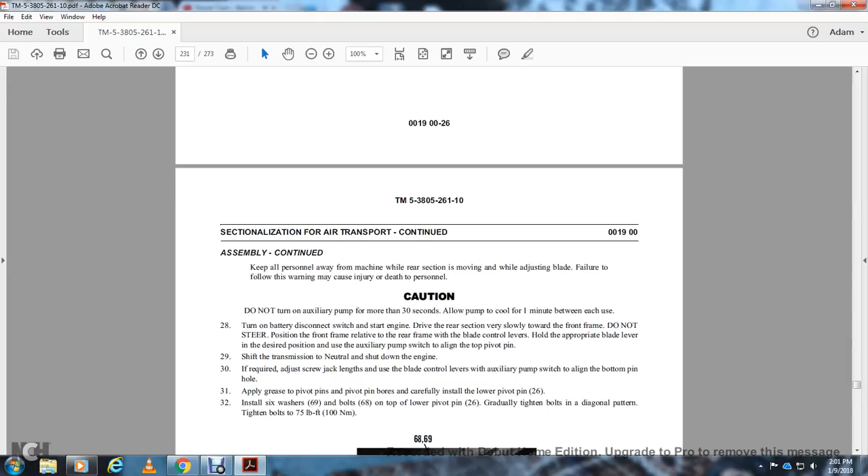Install the washer 69 and bolts 68 on the lower pivot. Gradually tighten the bolts in a diagonal pattern to 75 foot-pounds of torque.

Note: during the retainer installation, position the two bolts and align the shim, then install the retainer shim with the 6 bolts at the bottom of the lower pivot pin, gradually tightening the bolts in a diagonal pattern.

Install caps 24, washers 23, and bolts 22 at the bottom of the lower pivot 26, and tighten the bolts to 100 foot-pounds of torque.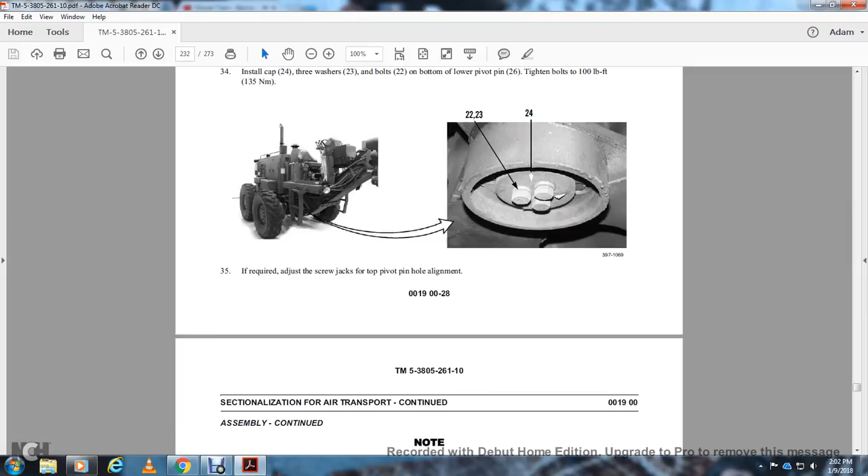If required, adjust the screw jacks for alignment of the top pivot pin hole. Note: the side of the pivot pin must face the machine mounting with the pump drive, and the shaft guard grease fitting must face the right side.

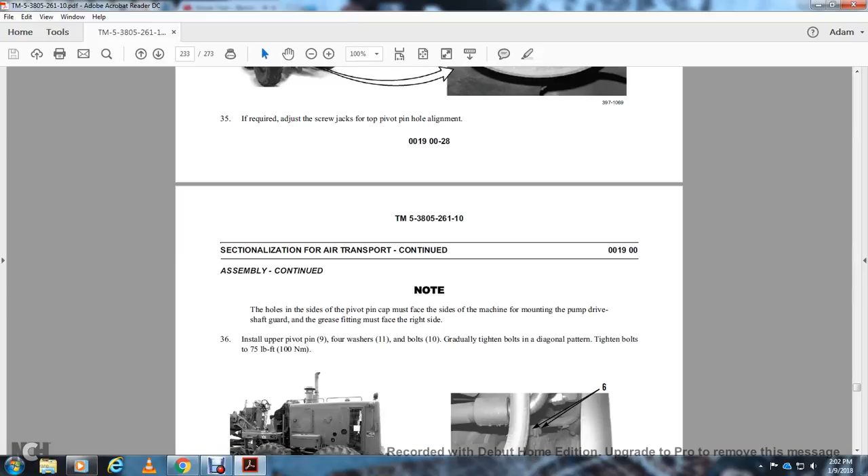Install the upper pivot pin 9 with the 4 washers 11 and bolts 10, gradually tightening the bolts in a diagonal pattern to 75 foot-pounds of torque.

Turn the battery disconnect switch off. Remove the engine drive yoke guard at the rear and store it in the toolbox. Remove the tool bolts and the pump drive shaft lock bar from the yoke, then store the lock bar in the front toolbox.

Assembly continued. Warning: wear eye protection when connecting the pressurized hose. Failure to follow this warning may cause injury to personnel.

Disconnect the two hydraulic jumper hoses and the electrical jumper harness. Install the protective cap, store the hoses and electrical harness in the toolbox.

There are 2 different thread types for the drive shaft; the coarse thread bolts are used on the engine side of the drive shaft, and the fine thread bolts are on the pump side of the drive shaft. Install the pump drive shaft.

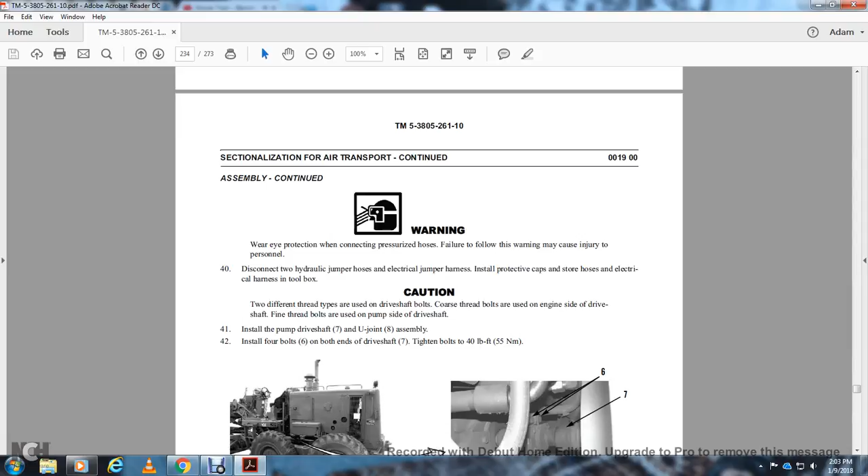U-joint assembly. Install the 4 bolts on both ends of the drive shaft. Tighten to 40 pounds of torque.

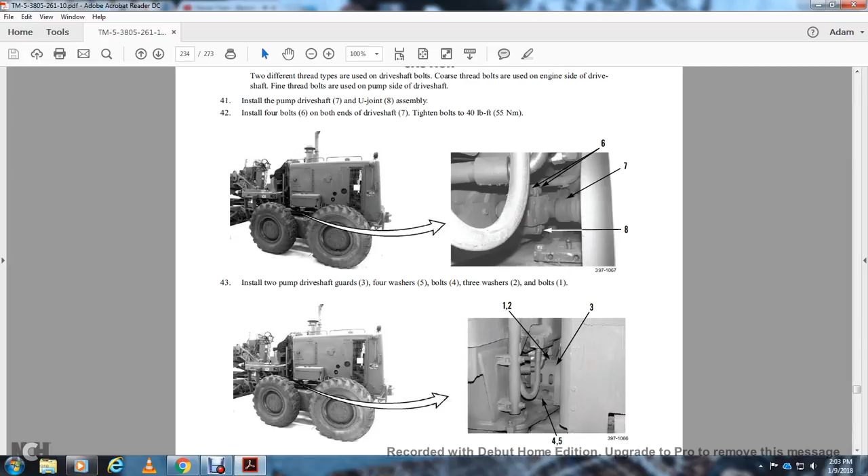Install the 2 pump drive shaft gear guards, item 3, four washers 5, bolts 4, washer 2, and bolts 1. Assembly continued. Disconnect the remote control hose, the electrical connector 76, and cable 75 to the remote control box 72.

Install the dust covers on all the connections. Install the cover 74 with the 2 bolts 73 on the remote control box.

Warning: use extreme caution when handling; the load must be provided with adequate support. Failure to follow this procedure may result in injury to personnel. Note: the remote control box weighs 68 pounds.

When assisting with the remote control box item 72 from the rear of the frame, install it at the top front of the frame. Install the 2 bolts 71 and nuts 70, for the remote control.

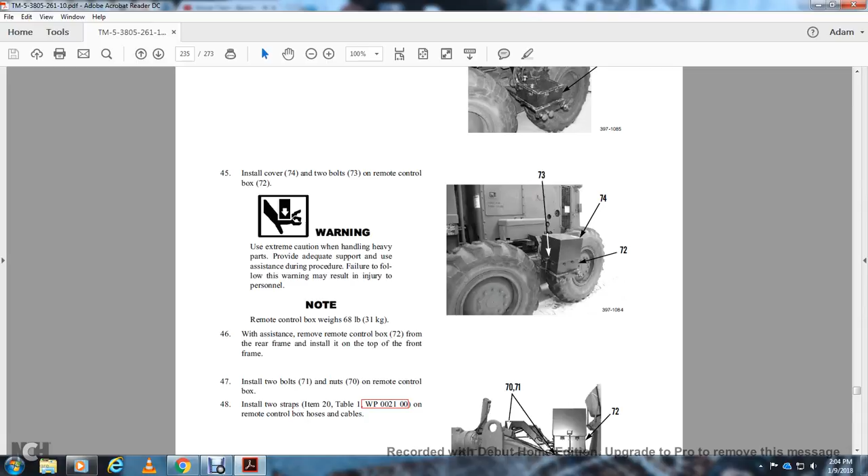Install the 2 straps, item 20 with table 1, on the remote control box hoses and cables.

Assembly: remove the 2 spring caps and clips, 65 and 64, and the spring of the jack, item 63, from the rear of the frame, and store them in the toolbox.

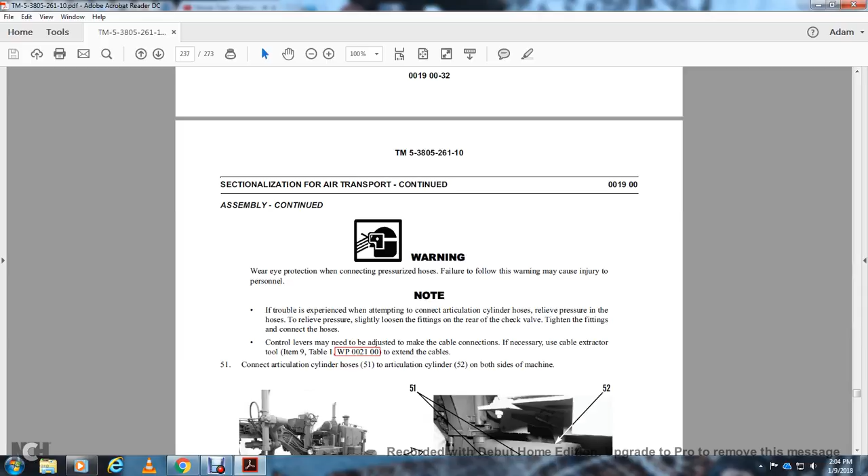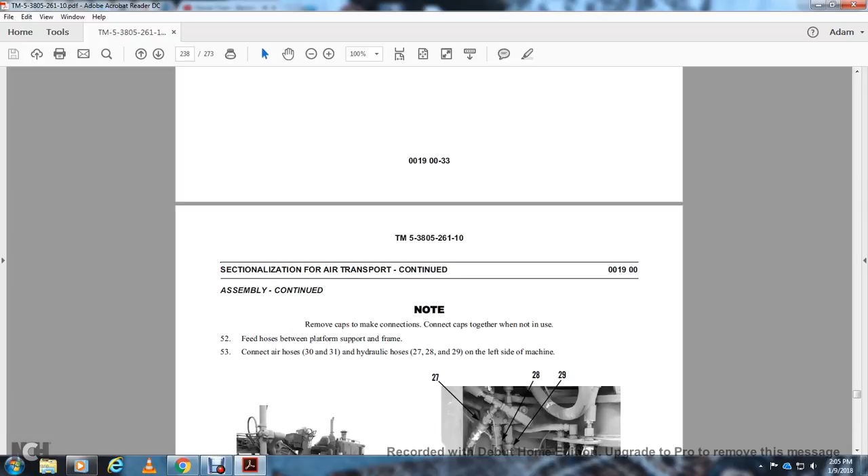Remove the caps from the connections, connect the caps together when not in use, and feed the hose through the platform support frame. Connect the air hoses 30 and 31, and hydraulic hoses 27, 28, and 29 on the left side of the machine.

Connect the clutch cable to 42 on the left side of the machine. Remove the caps to make the connections, and connect the caps together when not in use.

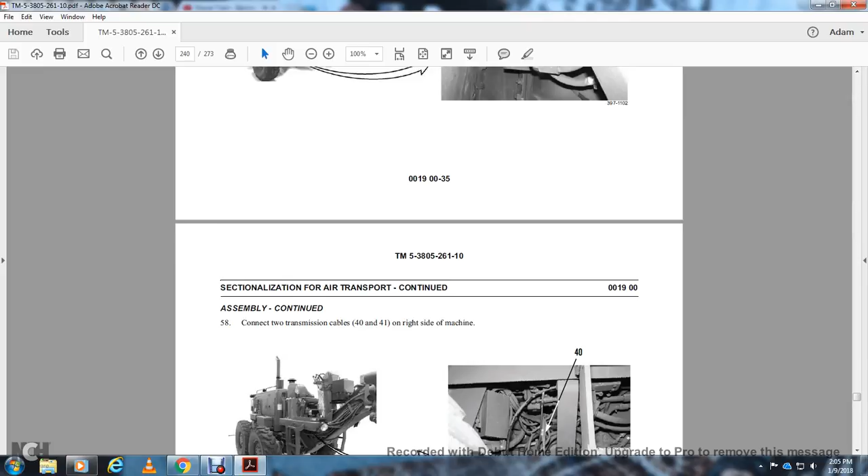Connect the two transmission cables, 40 and 41, on the right side of the machine. Remove the bolt and washer, 40.

Remove the bolt 46, washer 47, and clamp 48 on the right side of the machine. Install the clamp 48, washer 47, and bolt 46 on the control cables below the operator compartment.

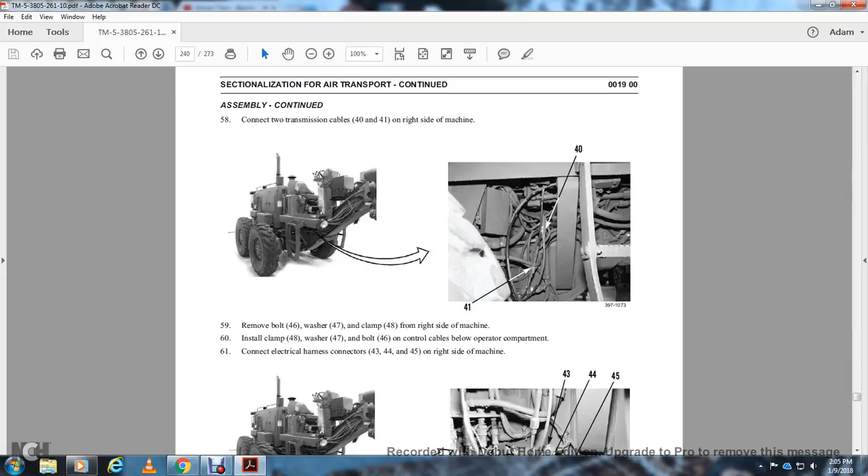Connect the electrical harness 43, 44, and 45 on the right side of the machine. Install the clamp, washer, clamp 38, washers 37, and nuts 36 on the inside of the machine.

Rotate the electrical harness 63 to the rear of the machine, connecting the rear harness connector.

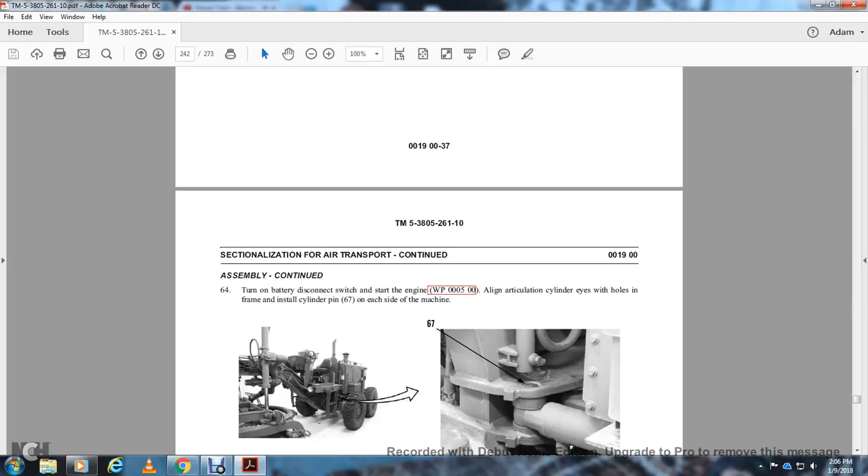Turn on the battery disconnect switch and start the engine. Align the articulation cylinder eyes with the holes in the frame, then install the cylinder pin on each side of the machine, and shut down the engine.

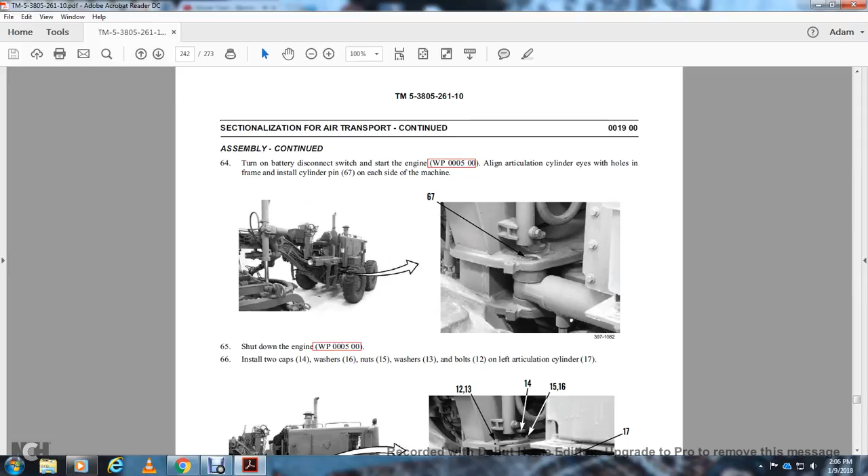Install the two caps 14, washers 16, nuts 15, washers 13, and bolt 12 on the left cylinder. Install the two retainer caps 20, four washers 19, bolts 18 on the right cylinder.

Articulation cylinder.

Store all tools and jumpers, and all other equipment in the toolbox at the front of the machine. Secure the lid. Warning: the ROPS must be installed before operating.

Failure to follow this warning may result in injury to personnel. Notify unit maintenance to install the ROPS and return the support to the front of the machine.

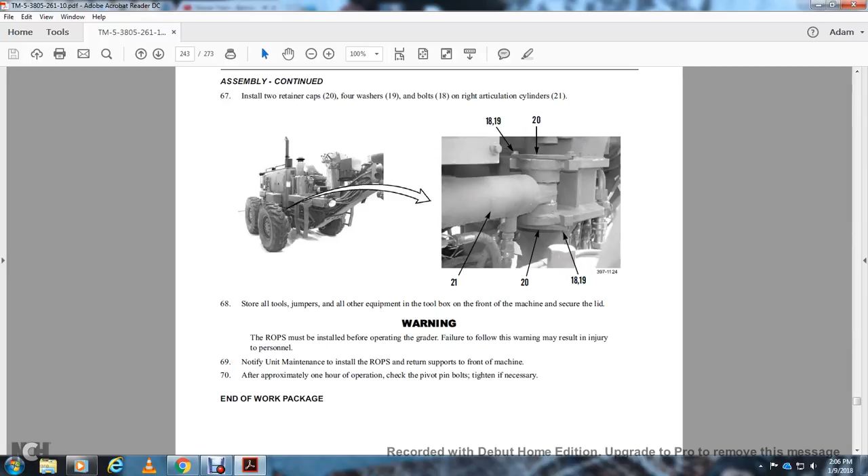After approximately 1 hour of operation, inspect the pivot pin bolts and tighten if necessary. End of the work package.

All right, Chapter 5: Supporting Information.